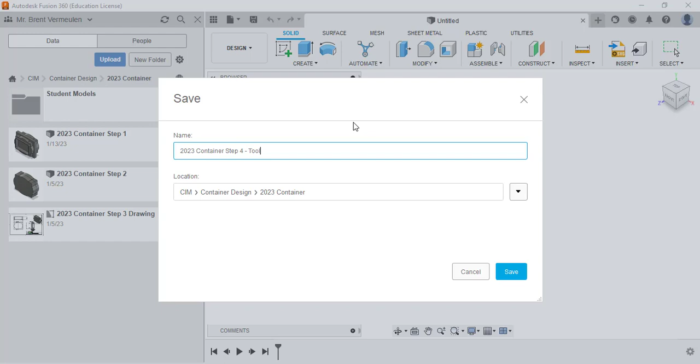In this video, we're going to go ahead and try and create some toolpaths for our base and our top so we can go ahead and cut out our container, our first couple steps of the container. So I'm going to start a new part here in the same folder, and I'm going to just call it the same thing, in this case 2023 container. I'm going to say this is step 4. I'm going to name this one actually Toolpaths. And then click save. Got to save it first before we can drag anything in.

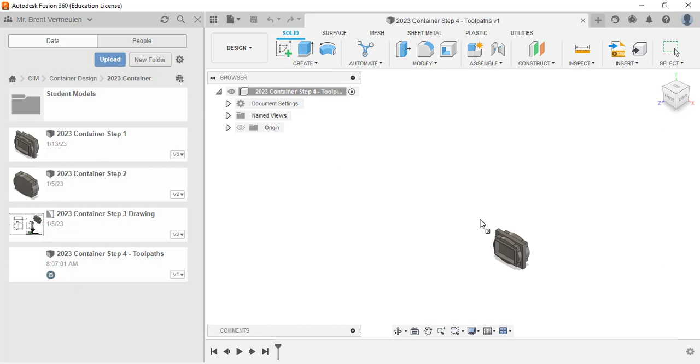You may open up step 1 or the first thing and you can put your toolpaths on there. That is fine too. In fact, that is probably the best practice for most people. But because I'm creating different steps, I'm just going to take this one and I'm going to drag and drop it in here. I'm going to leave it just like that because that's kind of the direction that I want it, and click OK.

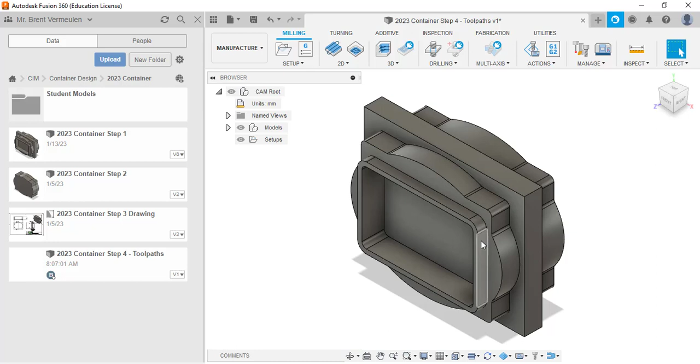And now I'm going to go over to the manufacture mode. Now just know that anything I change over here in step 1 will automatically reflect here in this step because they're linked together. Okay? So that's kind of why I did it that way. You don't have to, but you may. Change the units here. I'm going to change that to inches because that's what we've been using, and click OK. And now I'm ready to set up.

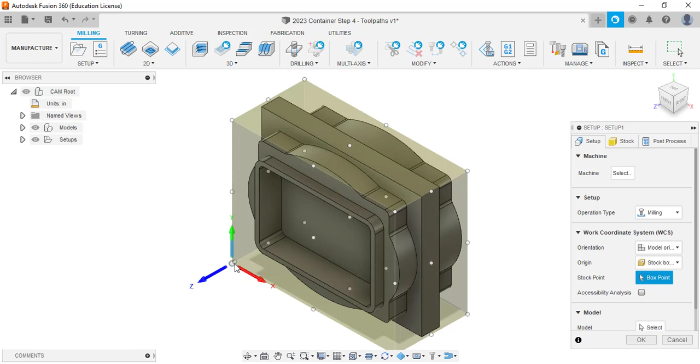So my first setup, of course, I'm going to click over here in the corner is where I'd want to click for my box point. It is Z height going up, the Y and the X direction. For my stock, I'm going to add some stock to the sides and top and bottom. Or actually what I'm going to do is not add this. We could add some stock if you needed to. Instead, I'm going to click a fixed box size, and I am going to actually type that in.

So in my case, I went with a dial caliper, and I measured that mine is actually 4.51 with the width and 3.513. Notice that I'm going to go from the center of the model on both of those, so it goes both directions. The height is going to be 2 inches. We're going to leave that exactly the same.

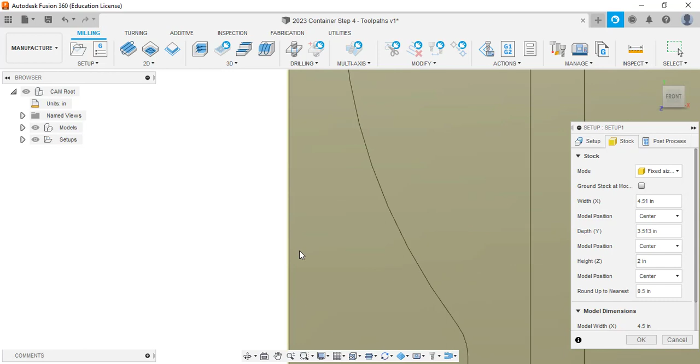And we can even look at that real close here. All right, if I look real close, you can see that it's a little bit bigger. See that? Just a little bit bigger than the 4.5. And then the same thing here. Should be just a little bit bigger than the actual 3.5 in my Y direction. Okay. I think I'm finished with this now.

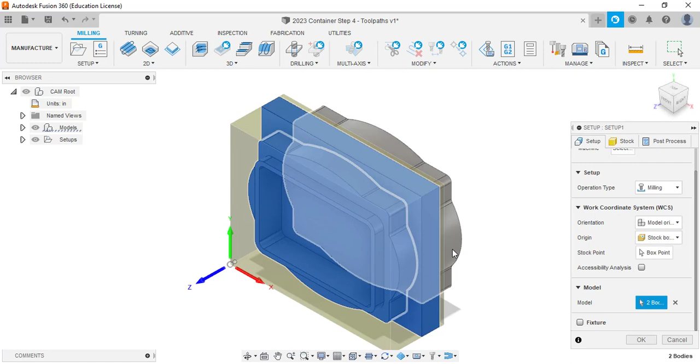Might have to select the model so it knows. So I'm going to select both of these. Okay. And so it knows the model there. And then back to stock, make sure everything's set up correctly. And then I will click OK. All right, now I have my setup correct. I did that by actually measuring out the physical part that I have. And I can get started with this.

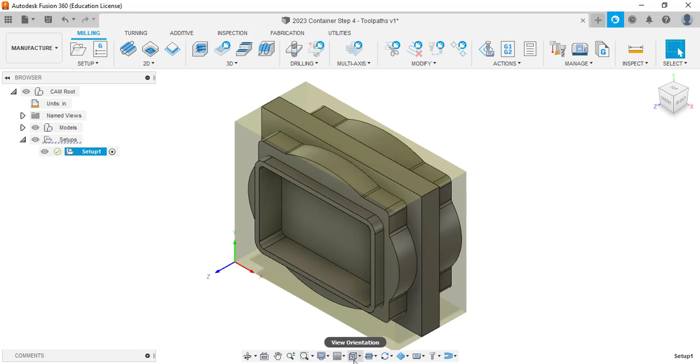I'm going to go down here where it has the view orientation and go to Tool Isometric. I like viewing it from this spot, kind of what we're going to cut it out at, where we're going to clamp it. And then we can start putting this together. I think sometimes it doesn't matter the order, but picture the box itself is all together, right, the stock. And so I'm going to hog out the big part first, and that is this pocket right here.

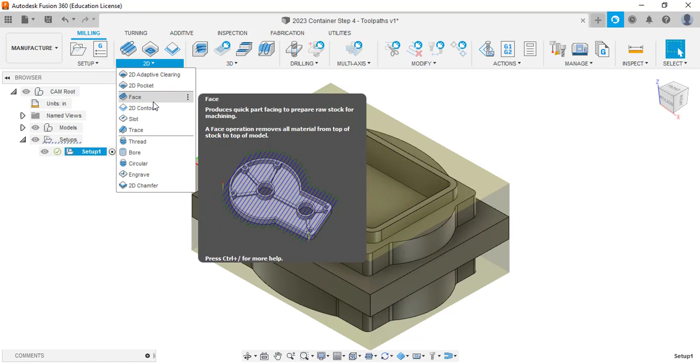All right, and so I will go down over here to 2D, and we'll select pocket. And I'll select the bottom face because that's how far I want to go down. And the tool, though, I want to put in there is going to be over here, and it's actually called the Amana tools. Yeah, Amana tools right there. And then these Amana tools, they have a number 1 by them, all of them.

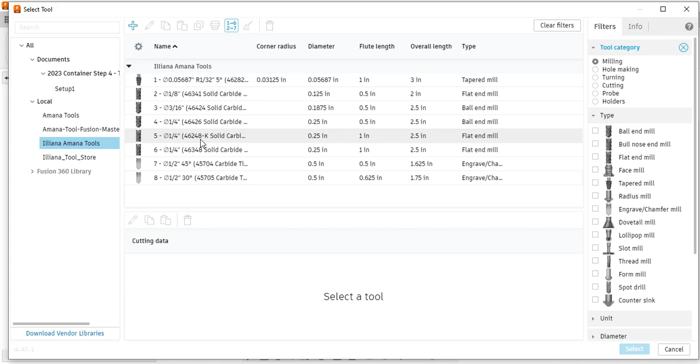I'm going to try to renumber those in a second, and I can do that by clicking renumber. I'm not going to renumber lengths and diameters and all that. I'm just going to renumber each one, and so it's easier to remember. And I believe the one we want to select is number 5, but make sure it is a flat end mill, okay? And that is a 1/4 inch flat end mill. I'm going to try to do everything from this 1/4 inch flat end mill. So we'll go ahead and select that.

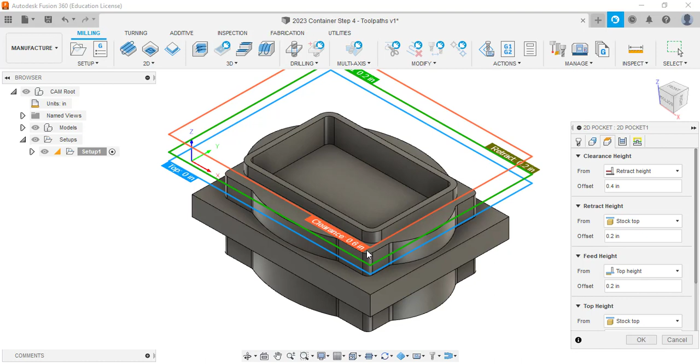We had already selected the geometry was the bottom. Let's keep going through here. This is something we don't want to forget. We want to take a look at all of these things, okay? The heights, right? The clearance, retract height, those should all be okay. The clearance height could be a little less, but for right now we're going to leave it that way just by default.

The passes are important for what we need to do. I would select both ways all the time. It just makes it a little quicker. It goes both directions then. Stock to leave, we don't want to leave any stock. We want this to look exactly like it does in the model, but we do have to have multiple depths. Multiple depths, otherwise it would be too much to do at once. That is a huge key. And so in this case, I'm going to do half of whatever the diameter is, and so 0.125.

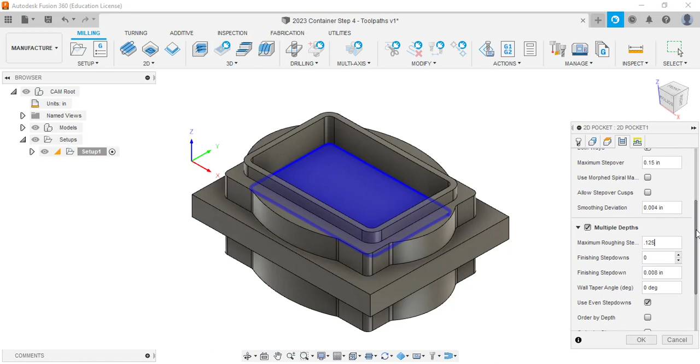And then I'm going to use even step downs. Maybe it's a little bit different than 0.125. We'll use even step downs. It kind of divides it perfectly for us all. All right, so that's those. There's other things we can do here that you can mess around with, but we're going to go ahead and leave it like that with the multiple depths.

The linking here, a couple things we want to definitely do. Probably leave them all the same. Allow rapid retract. It means it goes up fast. That's good, like G0. And we want to keep the tool down so it doesn't go up every single time it makes a new pass. Okay, that's going to save us a bunch of time. Lead-in entry, we'll kind of show you what that looks like. You don't have to have a lead-in entry, but you may. It kind of leads them off to the side, and so it kind of helps it out a little bit. I'll leave those checked for now.

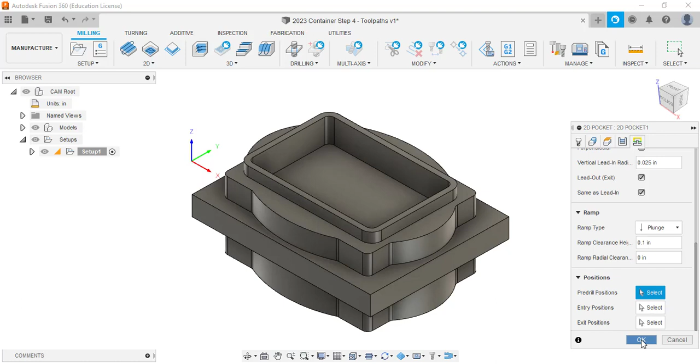One thing I do not want to do is the helix approach. You'll see the difference here, but the helix approach kind of twirls around. It takes a long time. We don't need to do that. We're going to plunge right into the stock, and so that makes it a lot quicker. So we're going to plunge, and then we're going to click OK, and we're going to see our setup here. So there it is, and actually it jumped right into the stock there. So you can see the multiple depths that it's going to do.

Okay, and over here we can see how long it actually takes. So I have my times in here, and I'll show you how to get those to show up for you, because that's really key. So it's going to take 2 minutes and 12 seconds at its fastest. We might slow it down a little bit in real life, but that's what it would take if I had it at its fastest speed.

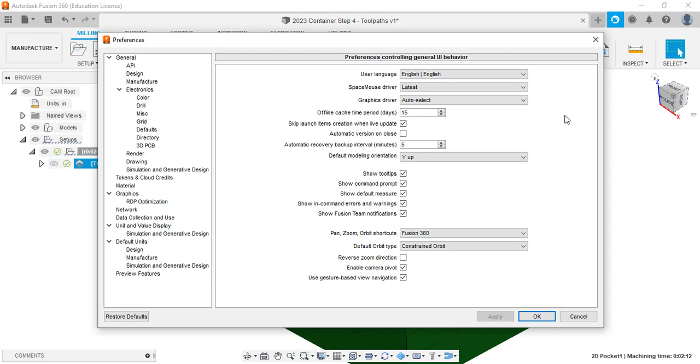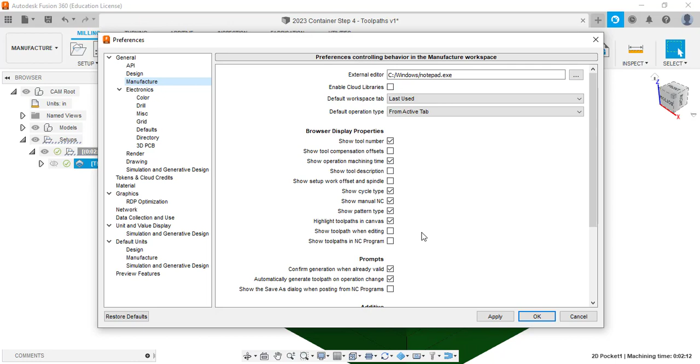Up here by your name, you can actually go to the little silhouette. You're going to go to Preferences. And under Manufacture, you can have the default units be inches. Oh, yeah, up here to Manufacture. And what we're going to do is we can show the tool number and show operation machining time. Okay? That's a good one to do too. So those few things. And then apply and click OK. And that should display your machine time there and what tool that you have. That's why we renumbered the tools.

All right, let's do another one. In this case, I'm going to click off of that. We can click back on it. It'll show us. But we'll do another one. And I think this one, now that we're up there, we'll go ahead and do this contour around the edge. And so this is a 2D contour. I'm going to select this face right there. It should have the same tool selected, which is nice. And then the height should be the same. The passes, we're going to double check here. We're going to select multiple depths, and we're going to change that to 0.125, just like we did before. We don't want to go too deep.

We'll keep the tool down as we do that, and we can do that lead-in entry, and it looks like everything is okay there. And then I'm gonna double check here. This one, did we have stock to leave on that? No, we don't. That's good. We don't want to leave any stock. All right, I'm gonna click OK, and it went around that outside there. So one more thing here. That one goes really quick, 14 seconds, it says.

I'm going to show you a little trick here to take some more stock out. See that it didn't get all the way to the outside edge here. We could have done an adaptive milling, and that could work, and you may do that yourself. Instead, I'm going to do another contour, and I'm just going to offset it. So I'll show you how to do that. So I'm going to right-click this one, and I'm just going to duplicate it. And it creates the exact same thing. So it's doing nothing different. So instead of going right around that one, I'm going to go to this one.

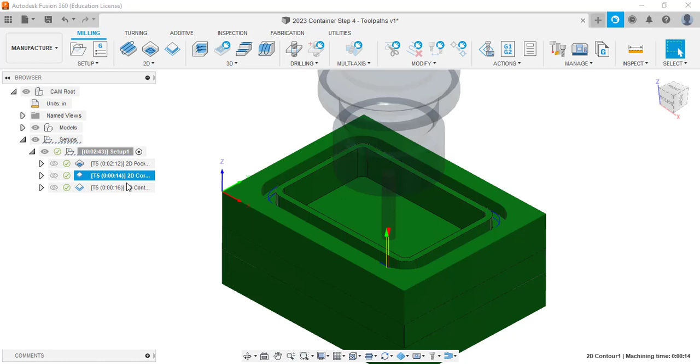All right, so I have that one, really quick contours that we're going to do. You can see it's a little bit longer, so it takes 16 seconds. The only difference is this one's really close to it, and this one's a little bit farther outside, so it takes a little bit more stock there. All right, now I'm ready to do this contour around the outside edge. So we'll do the same thing, 2D contour.

We'll select here, same tool, same heights, passes, gotta go to multiple depths. That one is the biggest thing here so we don't break a tool. And 0.125 for the multiple depths. And no stock to leave, we'll leave it the same. And we'll make sure we'll keep the tool down, saves on some time. And I think we have everything we need. And then we'll go ahead and click OK.

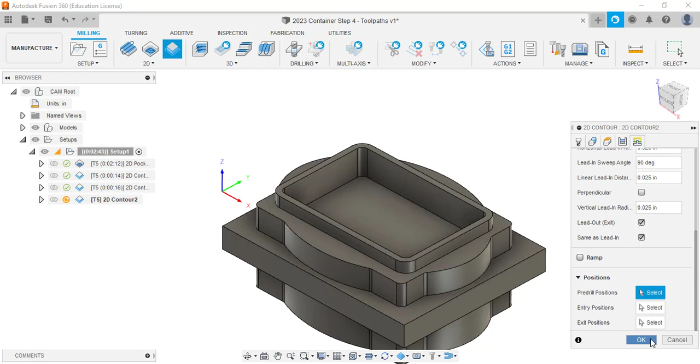We'll take a look here. And sure enough, there it goes. It's going to create all those. All right, so that's the next one. But we can see one thing, and this is one I want to point out here. This little guy right here didn't get cut off from the last one. So I needed to go a little bit farther with that offset to get that cut off.

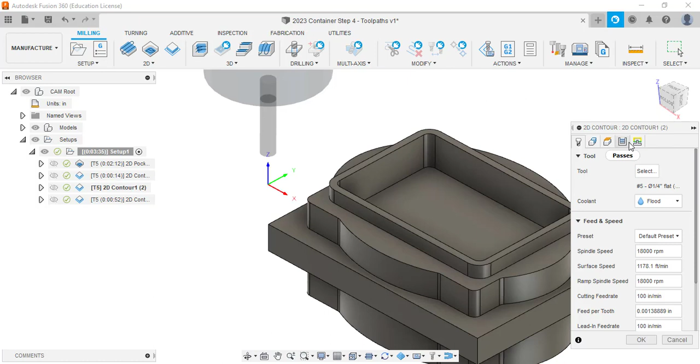Now you might have that in yours or maybe not, but I'm going to go back to this other one, and I'm going to double click it. And that stock to leave on the passes down here, I'm going to leave a little bit more stock. So let's say 0.23. As long as it's below 0.25, we should be good. I'm going to do that. And then when I select this one, let's see here. Yep, it got rid of those.

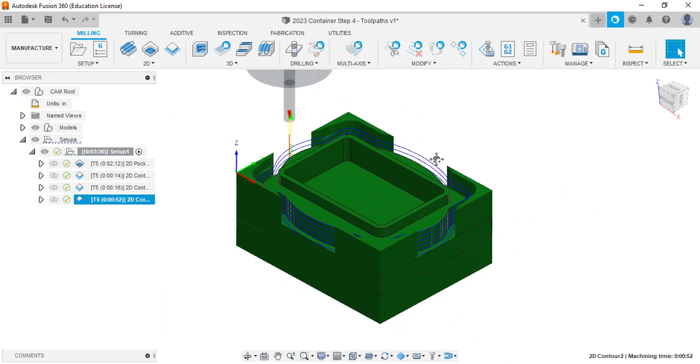Okay. So I think I have all the parts on the top here. The only thing I don't have is these corners, which I can actually just cut off with the bandsaw if I wanted to. Or I can do the same thing. I can right-click this one and copy it and then offset it a little bit to get a little bit more off there. Since it's only 50 seconds, that's not a hard thing to do. So I might go ahead and do that since we're talking about it.

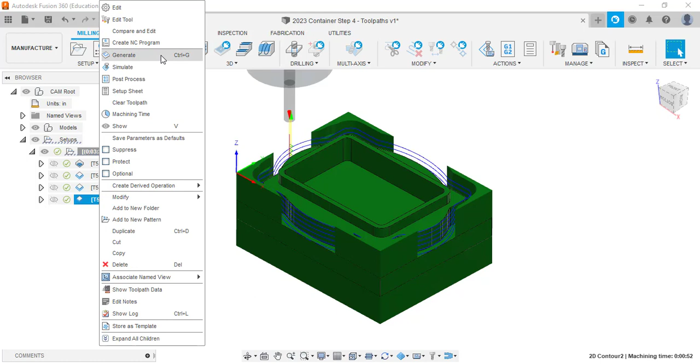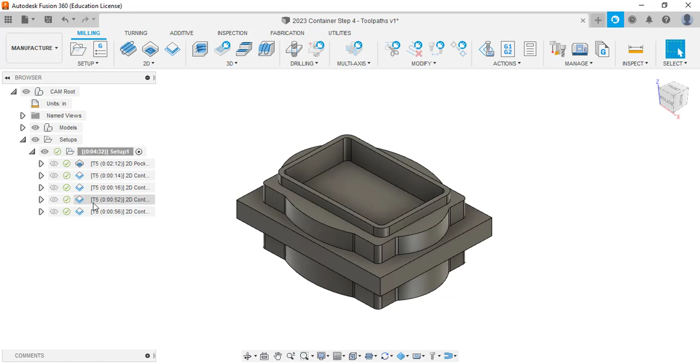Duplicate, double click this one. Only thing I'm changing is the stock to leave and 0 on the axial and let's do 0.2 like we did before. And then that'll give us a little bit farther outside there. Just took us another 1 minute to do that. So total machine time for this one's under 5 minutes for the setup. I'm going to change the name of this one to base. All right, and there is my base setup.

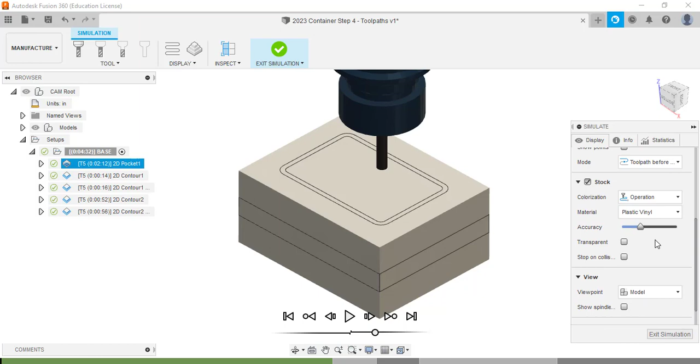And then I'm going to quickly simulate this by right-clicking, going to simulate. And then we can change some options here if we need to. Make sure we got the accuracy there. I would like to say comparison. That gives us a comparison between the actual stock and that when it's finished. We'll go ahead and click play, and you can watch it go. This is very important. You can see exactly where it's going to go in, so you know where it's going to go in when you put your block in.

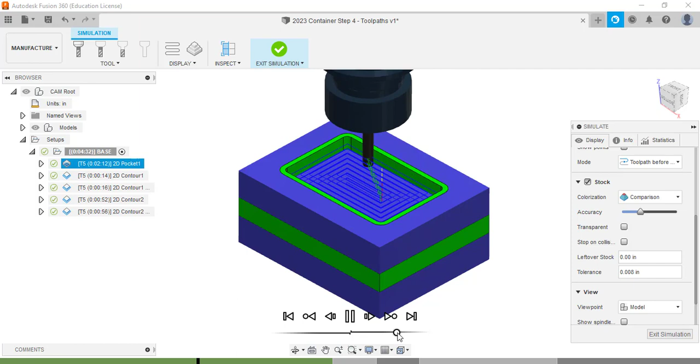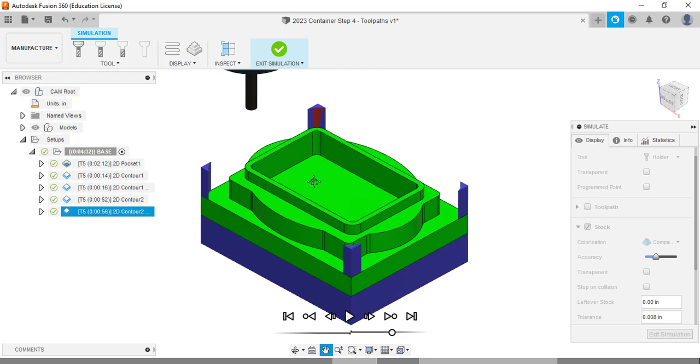And then I'm going to go ahead and speed that up, because we know that one worked. And it goes around again, outside there, and the outside again there. And I'm just left with these itty-bitty little corners, which I can just break off later on. It looks like it got it the same. I can actually go ahead and hide the toolpaths here so I can see, is there any blue? And there's not. It looks just like the model. So I think I'm ready to go. And I will click exit simulation.

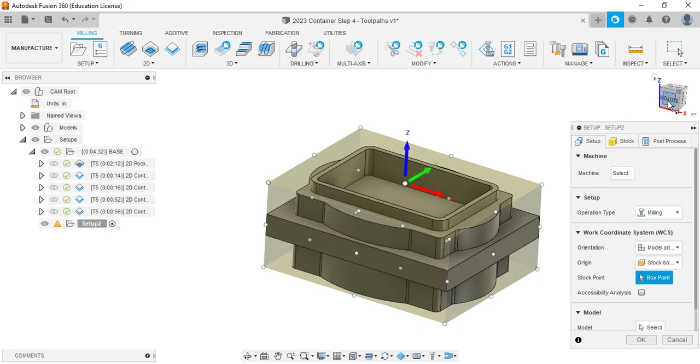And then I can do the next setup. So I would be able to click setup again and just flip the part over to do the setup on the other side. So that's the last thing I want to show you. I'll click setup here for a new setup. I'm going to look straight at the part here, and I'm just going to flip it over like I would in real life here. So this is actually the corner I want.

I'm going to need to do a little bit of flipping here. I'll have to select maybe the Z and X planes. That's fine. So the Z axis is this one here, and the X axis is this one here. And then we'll go ahead and select the box point in the corner. Don't be alarmed, I just got to flip the X axis, so I'll do that. And now we have it where we need to.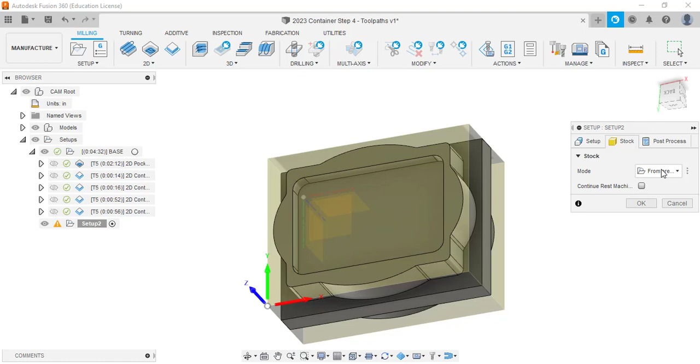The stock is from, see this? It says from the preceding setup. So that was the other setup. So we know the stock is exactly the same. And now we can click OK. Oh, no model selected. Okay. Let's go back and select that model, right? So looks like it did it for me. And then we can click OK here. And now we're ready to go for the other side, which would technically be the top side.